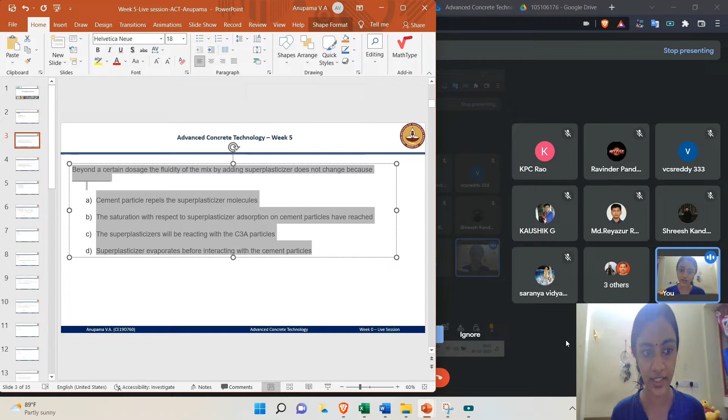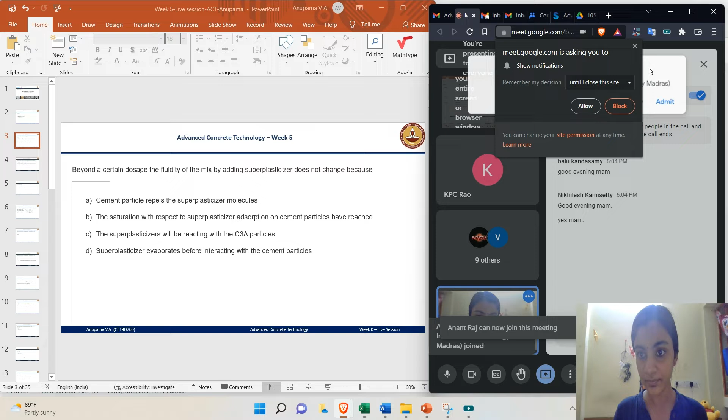Beyond a certain dosage, the fluidity of the mix by adding superplasticizer does not change because of dash. Sorry, one second. Yes. So the question is, if you keep on adding superplasticizer beyond one dosage, the fluidity does not change. So, what might be the reason for that? Let me post the question again in the chat box. Thanks, Shreesh, for the immediate response. Beyond a certain dosage, the fluidity of the mix by adding superplasticizer does not change.

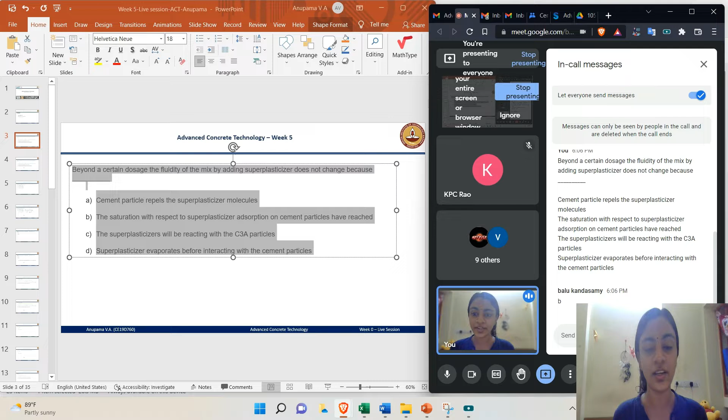So, superplasticizer we generally add in order to increase the workability, or keeping the workability same, increase the strength or reduce the cement content, etc. So, we think that when you add more and more superplasticizer, the mix will get more and more fluidity or workability. But the actual situation is that yes, it does increase, but after a particular optimum dosage, the fluidity does not further increase. So, what might be the reasons for the same?

That is, cement particle repels the superplasticizer molecules, or after that optimum dosage, the saturation with respect to superplasticizer adsorption on cement particles has reached, or the superplasticizers will be reacting with the C3A particles, or the superplasticizer evaporates before interacting with the cement particles.

Yes, I can see three answers. Okay, four answers. Shri, Sharanya, and Balu say B. Riya says B. Nikhilesh, okay. You can just simply type the option. That will be easy for you. I'm waiting for more answers. Yeah, Nikhilesh, no problem. How many are there? 14 attendees are there. So, shall I wait for some more time? I think this is a fairly easy question, so I would like if more of you can answer. Where are the other answers? Are you guys traveling? Are you not in a position to type?

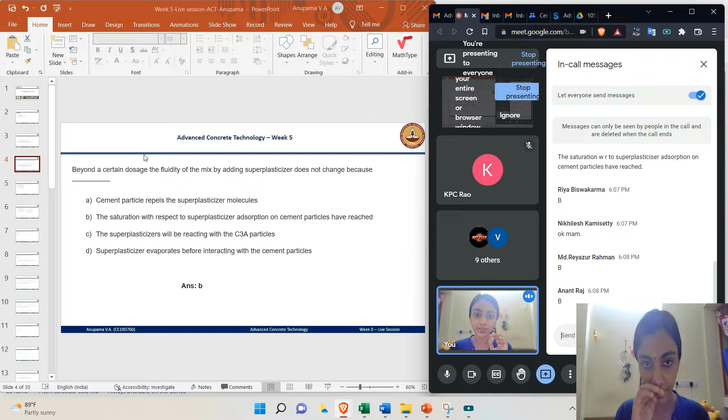Moving on to the next question. As per Aitcin, for a compatible combination of cement and superplasticizer, the flow curves from marsh cone test coincide at the time. The options are 0 minutes and 60 minutes, 10 minutes and 60 minutes, 0 minutes and 100 minutes, 0 minutes and 10 minutes. Thanks again, Shreesh, for the quick reply.

So, according to Aitcin, we have to do the marsh cone test to find the compatibility between the cement and the superplasticizer, because not all superplasticizers are compatible with a particular type of cement or binder. If you do the marsh cone test, you can see the flow curve at a particular time. He says that at particular times t1 and t2, the curves coincide. So what are t1 and t2? Is it 0 and 60 minutes, 10 and 60 minutes, 0 and 100 minutes, or 0 and 10 minutes?

Okay, I'm getting more and more answers now. Sri Sharad, Riya, Anant, Sharanya, KPC Rao, Ravinder Pandey, and Nikhilesh have commented A. Thank you all for commenting. I'll wait for a few more seconds. Yes, Rahman and Balu commented A. So no one wants to go to any other option.

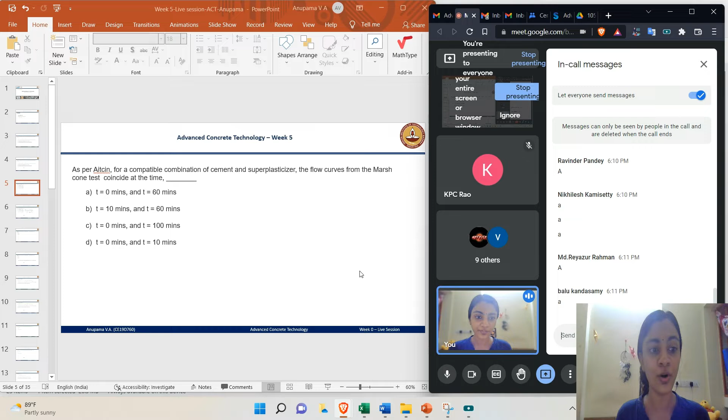So as of now, all of you have commented A. So moving on to the answer. I hope the answer screen is visible to you. So here it is. This is a flow curve. I just copy pasted from the slides we have. So when the SP is compatible, this is the initial and this is after 60 minutes.

So if at 0 minutes and at 60 minutes the curves are coinciding, then that particular cement and superplasticizer are considered to be compatible. So please remember the timing, 0 minutes and 60 minutes.

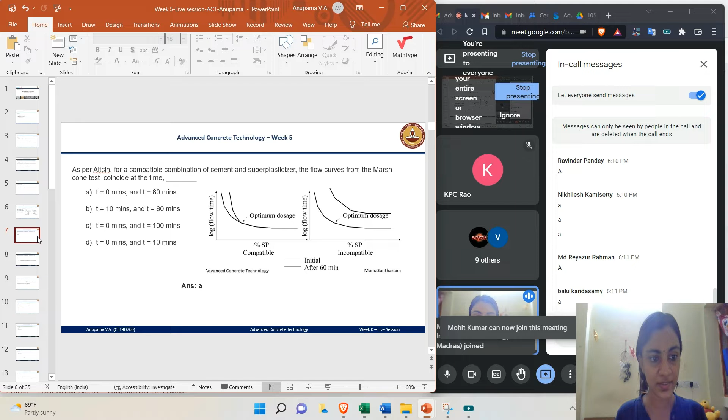I have received responses from Rao, Balu, Sharanya, Shri, Sharad, and Riya. So majority goes with false, and there are a little bit of true in between. Yeah, it might be a bit confusing because we have three generations of admixtures and different slump levels are mentioned. So here the catch is no slump concrete.

Yeah. Let me wait for a few more seconds. Let me see what are there. So I have not heard from Kaushik. Kaushik, if you are in a position to unmute, can you unmute? I have seen almost all the other names, I guess. Kaushik, are you in the meeting? Sharad Jadhav, are you in the meeting? If you can please unmute. Yes, I am in the meeting.

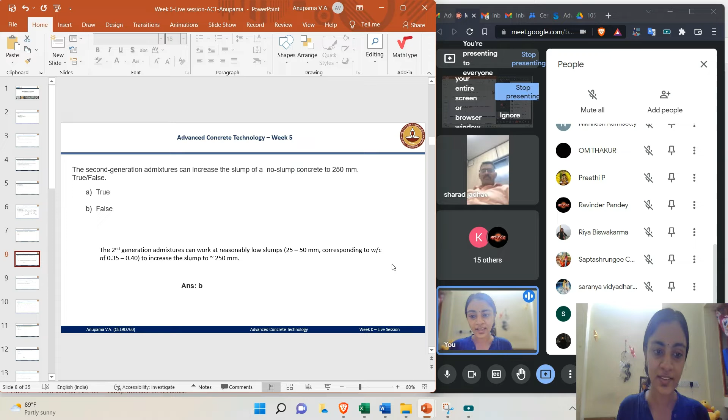So the correct answer, as rightly told, was B. The second generation admixtures can work at reasonably low slumps. It cannot work at a no slump concrete. It can work at a reasonably low slump, that is 25 to 50 mm, corresponding to a water cement ratio of 0.35 to 0.4, and it can increase it up to 250 mm. That is true, but not from a zero slump concrete. It can increase, but only from 25 to 50 mm. So the correct answer is false.

So thank you, Sharad sir. Sir, can you mute? Yeah, thank you so much.

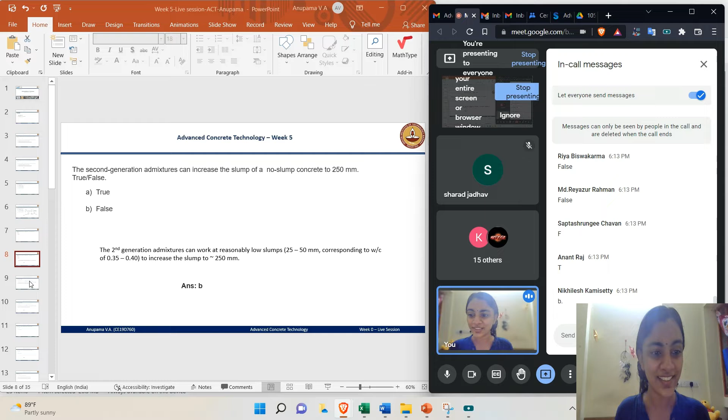Yes, so we move to the next question. Now, choose the correct statements. Read these statements carefully before you answer. It's about reactive powder concrete. Reactive powder concrete is also known as high early strength concrete. That's the first statement. Then, reactive powder concrete uses only fine aggregate and not the coarse aggregate.

Reactive powder concrete is intended to provide a compressive strength of more than 150 MPa. Then, SNF admixture is typically used in reactive powder concrete. So, these are the four statements.

So, yeah, I got the answers from Shrish, Reyazur Rahman, Anant Raj, and Saranya. Let me pause the screen share for a second. You have the question in the chat box. Yeah.

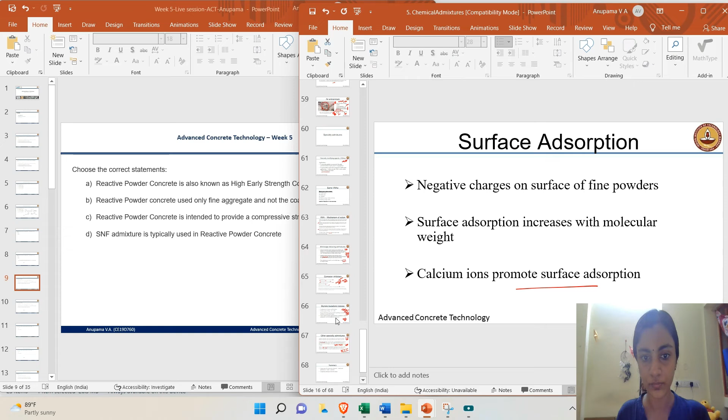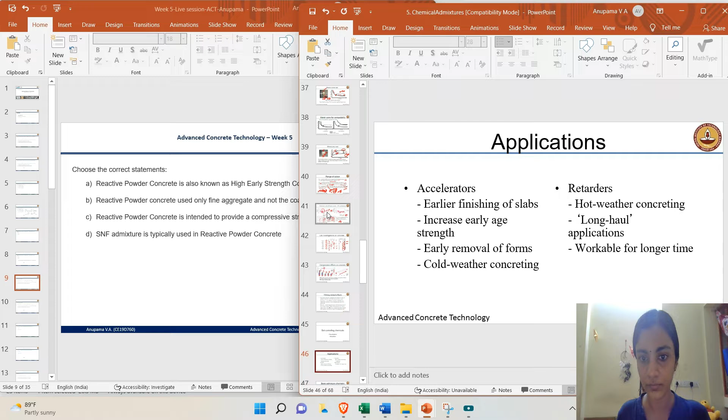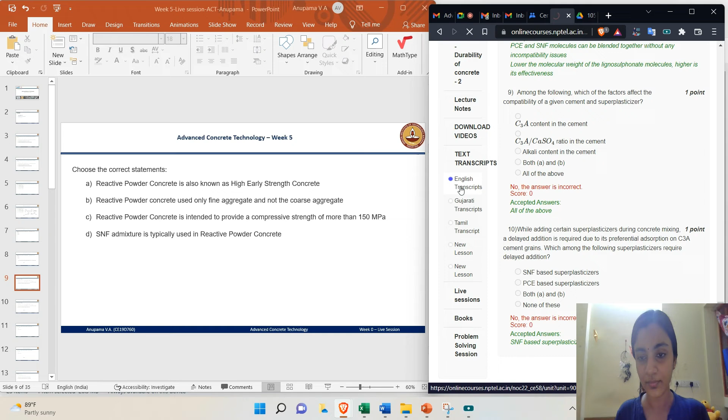Yes, I'm seeing so many answers. A, B, A, B. So, reactive powder concrete is also known as high early strength concrete and it uses only fine aggregate and not coarse aggregate. Okay. I'll wait for a few more seconds.

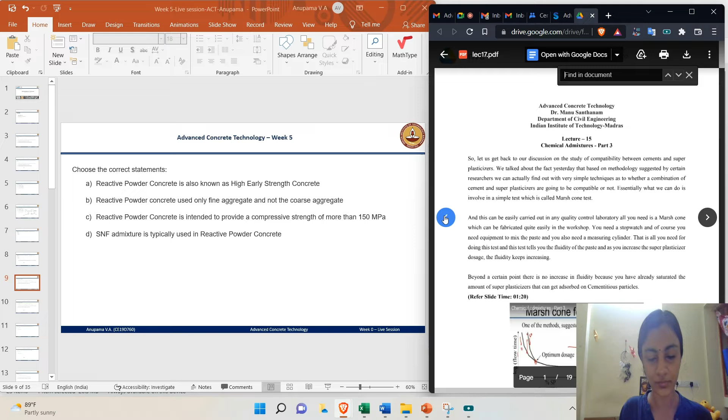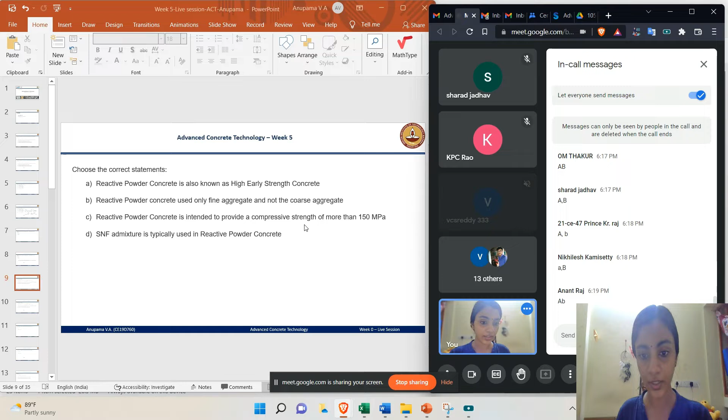Okay, so I'll share the screen. One second. Yeah, I hope the screen is visible to you.

So the options were, it's also known as high early strength concrete, it uses only fine aggregate and not the coarse aggregate, it is intended to provide a compressive strength of more than 150 MPa, and SNF admixture is typically used in reactive powder concrete. So I have received all the answers as AB or ABC except D. So thank you all for responding. So we move to the answers.

The correct answers are B and C. So who had commented B and C? Only Anant Raj, I guess, commented B and C. Yeah, I think yes, right? But then Anant Raj changed it to A and B. Okay. So the correct answer is B and C.

Why not A? Because it is also known as ultra high strength concrete. It's not high early strength concrete. It is ultra high strength concrete. So it's not A, and it uses only fine aggregate and not coarse aggregate. Hence the name reactive powder concrete.

And the reason for calling it ultra high strength concrete is because it has a compressive strength of more than 150 MPa generally. So B and C are the correct answers, and D, SNF admixture is not used in reactive powder concrete. Okay, so the correct answers are B and C.

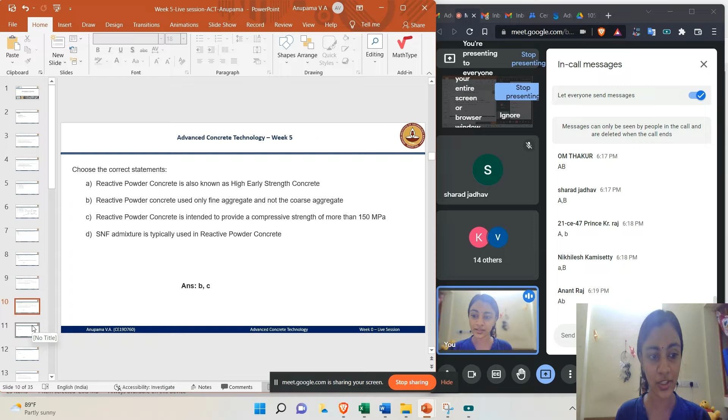No problem if your answers went wrong. So keep on answering in the chat box. Then only I'll know how much you're following, or whether you're here.

Okay. So the next question is, as the temperature increases, the superplasticizer dosage to produce a given slump increases, decreases, or does not change. As the temperature increases, the superplasticizer dosage to produce a given slump. So this is a fairly easy question. Yeah. As the temperature increases, the superplasticizer dosage to produce a given slump.

Okay. Thank you, Shreesh, Harsha, Rahman, Riya, Om Thakur, Anant Raj, and Balu, Nikhilesh. Thank you all for responding in the chat box. Others, yeah,

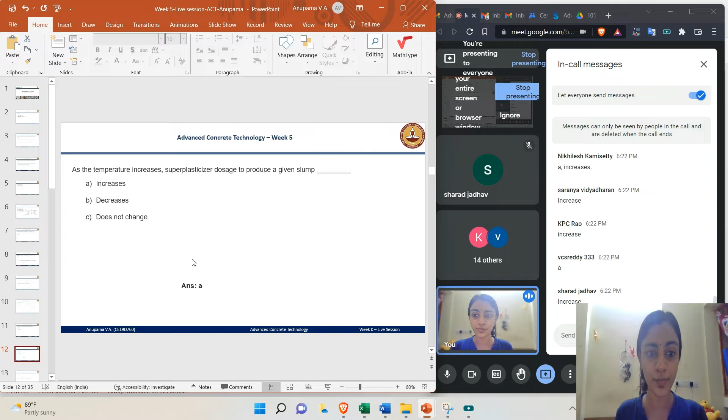okay. Since I'm getting more responses in increases, let me go to the answer. Yeah, the correct answer is increases. So as the temperature keeps on increasing, hydration takes place faster. So we need to give more superplasticizer dosage to produce a given slump initially. Moving on to the next question.

So, what are defoamers? The question is, what are defoamers? Options are as follows. A, they are foaming agents in air entrained concrete. Option B, they are admixtures to prevent air entrainment. Option C, they are chemicals that prevent bacterial growth in organic polymers. D, are they chemicals which facilitate effective dispersion of superplasticizers? So, what are defoamers?

So here the question is, what are defoamers? Are they foaming agents in air entrained concrete, or are they admixtures to prevent air entrainment? Are they chemicals that prevent bacterial growth in organic polymers, or are they chemicals which facilitate effective dispersion of superplasticizers?

Okay, so I've received the answers as they are foaming agents and they prevent bacterial growth. Okay, so I'm waiting for more answers. So I have received A and C. Okay. A, C. Okay. I'll wait for a few more seconds. Okay. Moving on to the answer.

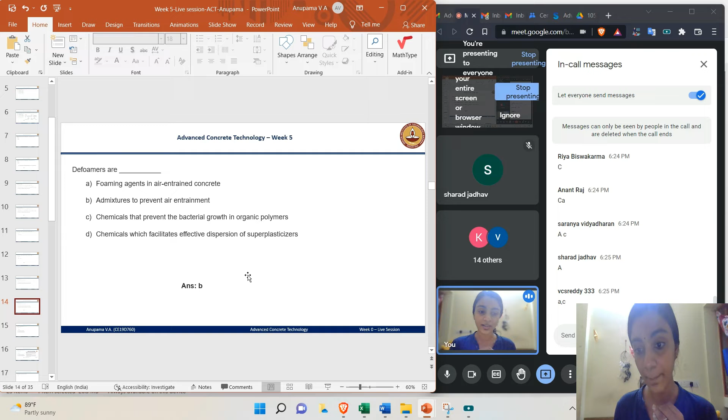Okay, so keep that in mind. The name shouldn't confuse you. In fact, the name should lead you to the answer. Foamers, I agree, are foaming agents in air entrained concrete, but defoaming means removing something, or being against something, so against foaming. So defoamers are the admixtures to prevent air entrainment. So the correct answer is B. Okay, moving on to the next question.

Accelerators increase the dissolution of dash. Calcium ions, aluminates, silicates, both calcium ions and silicates, or both calcium ions and aluminates. Accelerators. So you all know what accelerators are. They're majorly used in cold weather concreting, when we need to speed up the process of hydration, or when you need to remove the formwork very fast. In those cases, we use accelerators.

So there are different types of accelerators. Generally, the principle is that they increase the dissolution of certain ions. So the question is whether they increase the dissolution of calcium ions, or aluminates, or silicates, or both calcium ions and silicates, or both calcium ions and aluminates.

Okay. I can see that I have received so many responses. Thank you. Harsha, Bharat, Nikhilesh, Saranya, Riya, Anant Raj, Balu, Sharad, Shreesh. I have got a wide variety of responses, I guess. I have A. Okay, VS Reddy. Yeah. A, C, A, C, B, C, D. Good. Okay. I'll give 2, 3 more seconds.

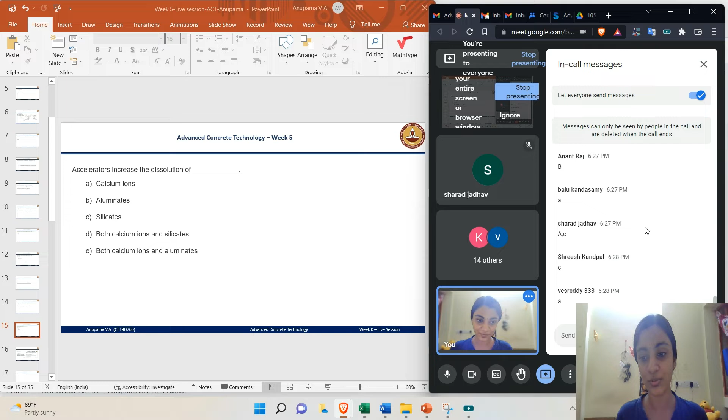A little bit more seconds, so that others who want to answer, please do answer. At least there are 17 people who can answer this question in this meeting. So please feel free to express your opinion. No one is judging you. So whichever you feel is right, please feel free to express it in the chat box.

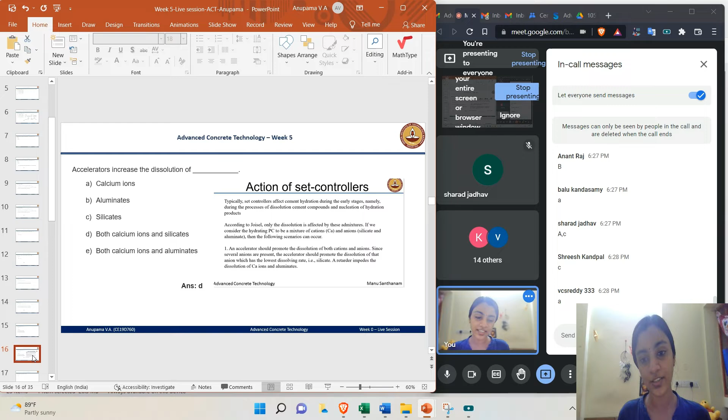Okay. So we move to the answer now. The correct answer is D. So I have included the screenshot of the PDF and PPT also here. So here, an accelerator should promote the dissolution of both cations and anions. Since several anions are present, the accelerator should promote the dissolution of the one with the least dissolving rate. So that is silicate. So comparing silicate and aluminate, silicate dissolves very slowly.

So like if you are in a manufacturing process, in order to increase the manufacturing rate, we need to improve the weakest link. So, like that, in the case of silicate and aluminate, aluminate dissociates faster. So, what lags behind is silicate. So, we need to improve the dissolution of silicate for an accelerated performance. So, an accelerator definitely will increase the dissolution rate of silicate.

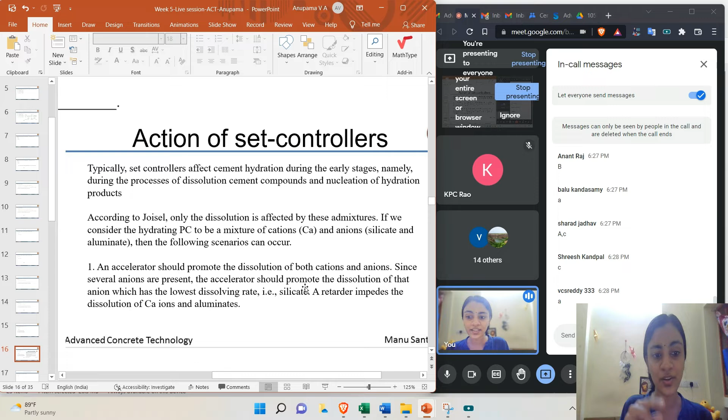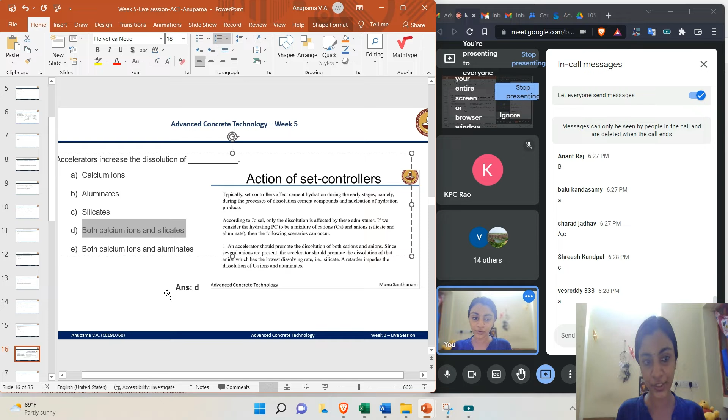And it says that both the cations and anions, it should promote the dissolution. So, for calcium and silicates, it will improve the dissolution. So, the correct answer is D. Okay, you're right if you say A and also C, but here D option says it's both A and C. So you have to go for option D. Moving on to the next question.

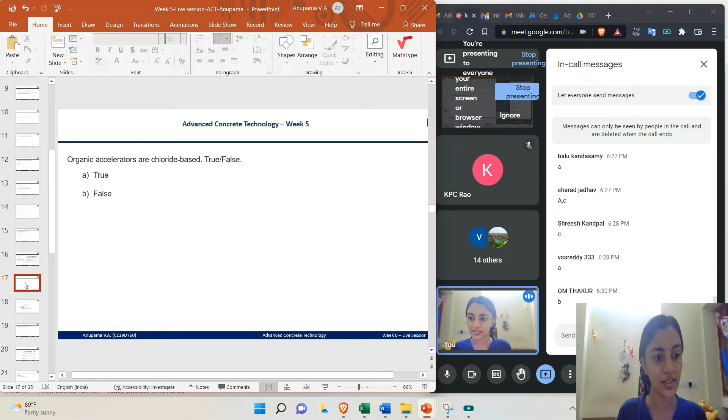No, B is not the answer because B is aluminates, right? Yeah, B is aluminates. Aluminates already have a higher dissolution rate. So generally the accelerator will focus on the ion which has the slowest dissolution rate. So that is silicate. Okay. So if you are running a relay, you have to focus on the person who has the least speed, because of him you guys might lose.

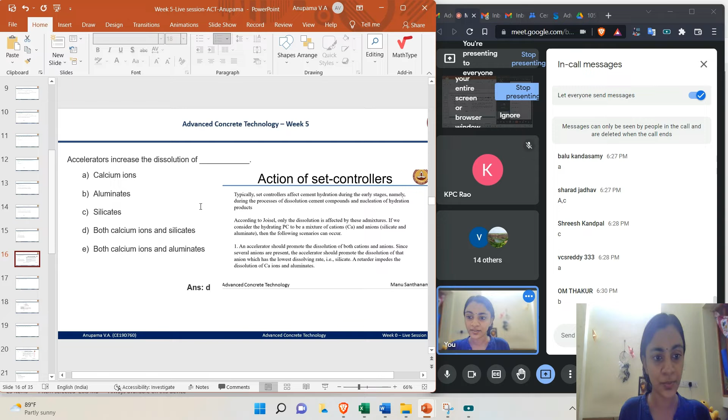So similar to that, there are so many cations and anions in the cement mix. So in that, the slowest dissolving is silicate. So you have to focus on silicate. So the correct answer is D. Moving on to the next question. Organic accelerators are chloride based. True or false? Organic accelerators are chloride based. True or false?

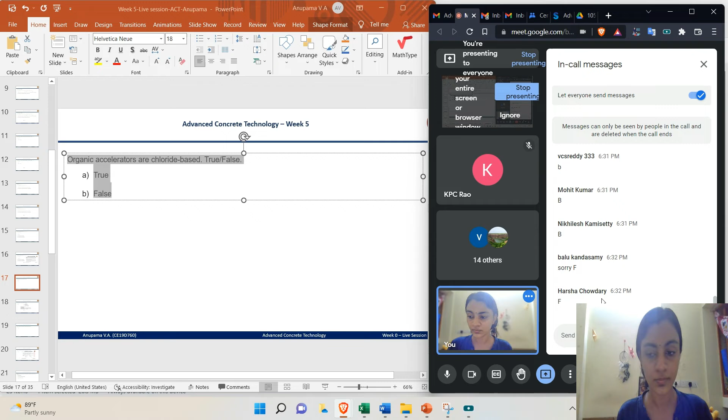Okay. Thank you, Shreesh and Balu. Others? Okay. Okay. Okay. So thank you all for responding. Shreesh, Balu, Bharat, Sharanya, Ria, V.C.S. Reddy, Mohit, Nikhilesh, Balu, Harsha, and KPC Rao.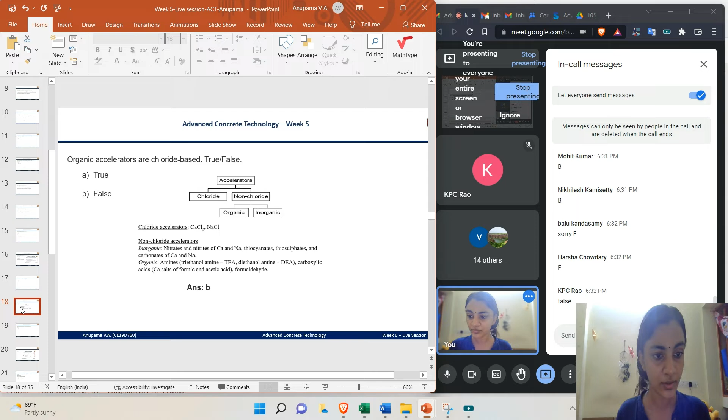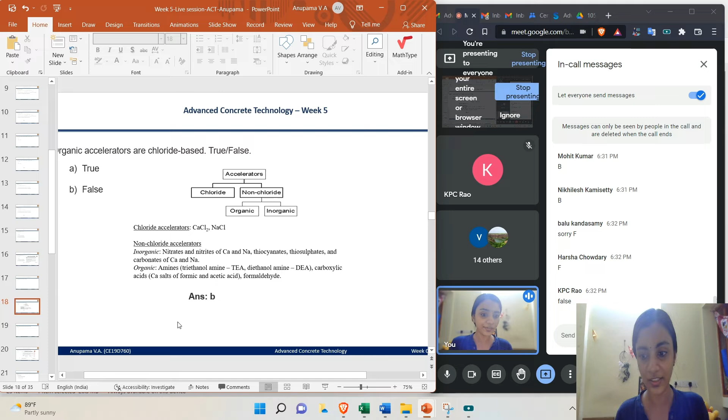Yes. So going on to the correct answer. So the answer is B, false. So here, if you see that screenshot from the presentation, the organic ones are TEA/DEA, triethanolamine or diethanolamine, basically the amines, and the carboxylic acids and formaldehyde. So the chloride accelerators, they are separate. Non-chloride are organic or inorganic. So chloride ones are calcium chloride and sodium chloride. So they are not organic accelerators. Okay. So the correct answer is false, as all of you have rightly told. Moving on to the next question.

The air entrainers have a hydrophilic main chain with hydrophobic branches. Whether it is true or false. Okay. Shrish, Harsha, Sharanya, thank you all for responding. Bharat, okay. Balu, Nikhilesh. Okay, let me go with Shrish. Shrish, can you unmute and tell why you think it is false, or is there any justification?

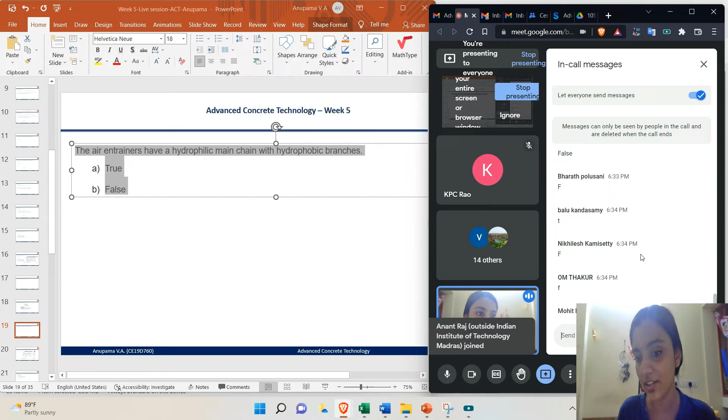Ma'am, it is saying that it has a hydrophilic main chain, which is wrong because for the air entraining agent, it is a polar group. Yeah. So there is a polar group, and attached to that is a hydrophobic main chain. Is that right? Hydrophobic chain. A hydrophobic short chain which is attached with a polar group, which is anionic in nature. Okay. Thank you, Shrish. So here telling that there's a main chain which is hydrophobic with a polar group attached to it.

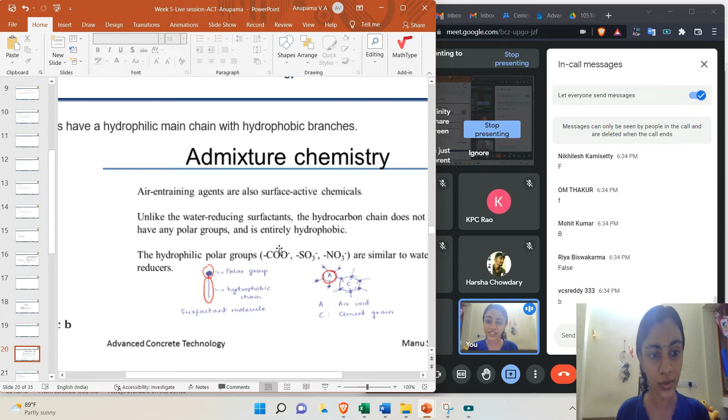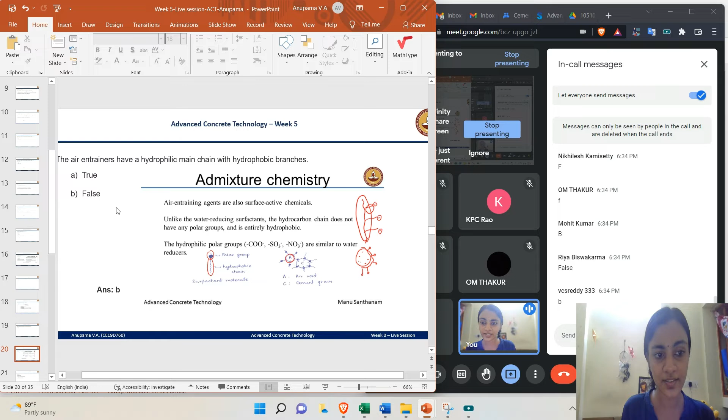Yeah. So let's move to the answer. So I guess many have responded. Mixed answers are coming. So the correct answer is false. So here, as Shrish rightly told, the hydrocarbon chain does not have any polar part. It is entirely hydrophobic. There is no hydrophilic main chain. So the entire chain is hydrophobic. So the correct answer is false. Moving on to the next one. It's again related to the air entraining agents.

So the question is, the air entraining admixtures stabilize the air bubbles generated by the agitation and mixing of concrete by altering the steric hindrance, or by altering the charge on the surface of the cement, or altering the cement surface tension, or altering the surface tension of water. So how do air entraining agents stabilize the bubbles?

So generally, when we mix or agitate the concrete, the air bubbles are formed, but the air bubbles will burst and just vanish within a matter of few seconds. It will not be stable. The air entrainers are added to stabilize the air bubbles. So how do they stabilize? Is it by steric hindrance, or by altering the charge on the cement surface, or by changing the cement surface tension, or by changing the water surface tension?

So yeah, thank you, Balu, Shrish, Bharat, Sharanya, Mohit, and Ria. I'm waiting for more answers from your end. Om, thank you.

So most of you have commented. Okay, I can see mixed responses. So there is altering the steric hindrance as one answer, altering the surface charge of cement as one answer, and altering the surface tension of water as another answer. So majority of you have commented surface tension of water. Yeah. So the correct answer is altering the surface tension.

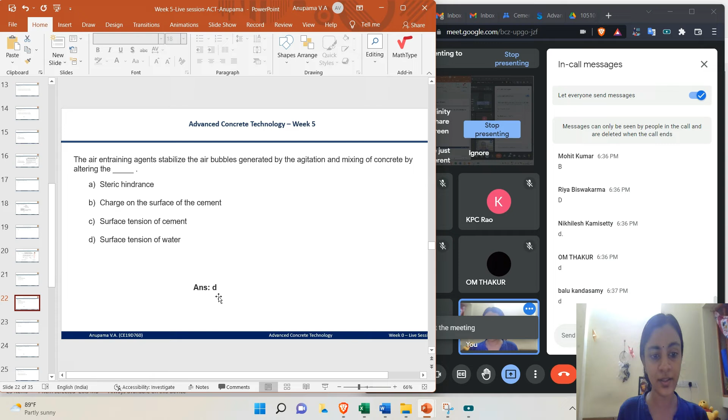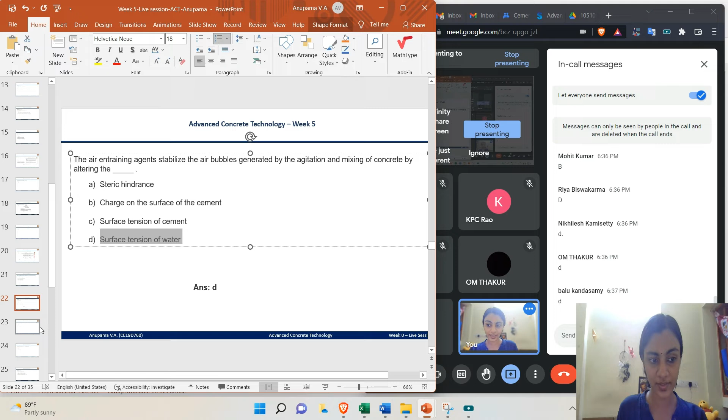So air entrainers change the surface tension of the water and it stabilizes the air bubbles within the cement. Yes. So those who all commented anything other than D, please stay corrected. Air entrainers work by altering the surface tension of water and stabilizing the air bubbles within the mix. Moving on to the next one.

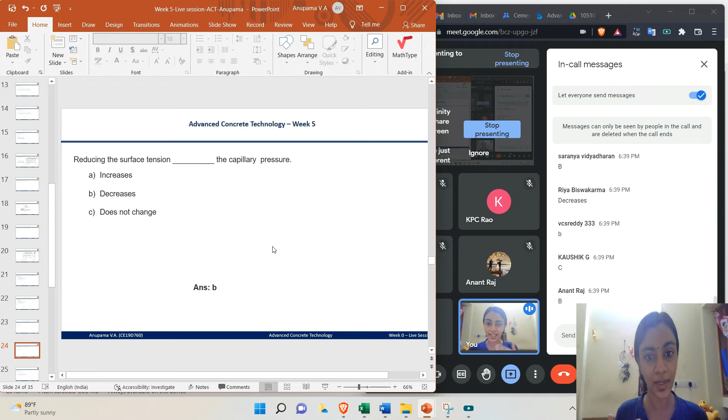The correct answer is decreases. So reduce surface tension, capillary pressure reduces. So they are directly related, not indirectly related. If you reduce the surface tension, the capillary pressure also decreases. So that is why the air entrainers are acting by reducing the surface tension of the water.

Now the next question is, what is latex? This was explained in Professor Manu's lecture. Is it the suspension of styrene in water? Option A. Option B, is it a suspension of butadiene in water? Option C, is it a solid solution of styrene and butadiene? Then option D, is it a suspension of styrene and butadiene in water? So what is latex? You might have heard this word quite a number of times.

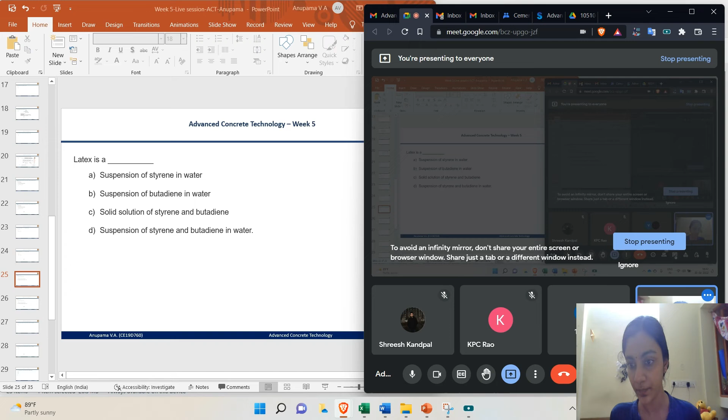Thank you, Bharat, for the quick reply. Shreesh, Anant, thanks for consistently replying in the chat box. Okay. Oh, I am getting so many C's. Solid solution of styrene and butadiene. Then Rao sir commented it is D. Shreesh also goes with D. Anyone else? What about Sharanya? Riya also goes with C. Sharanya also goes with C. Who else was there? Preeti, I have not heard Preeti yet. Are you there? You need not even unmute, you can just answer in the chat box. Dharmesh, I have not heard from you either. That's it with Riya. Okay. Moving to the answer.

Unlike the popular opinion, the answer is D. It is a suspension of styrene and butadiene in water. It's not a solid solution, it is a liquid solution. So styrene and butadiene are suspended in water, that makes latex. It is a solution in water which is a mix of styrene and butadiene. So stay corrected, please. The correct answer is D. Latex is a suspension of styrene and butadiene in water. Okay, moving to the next question.

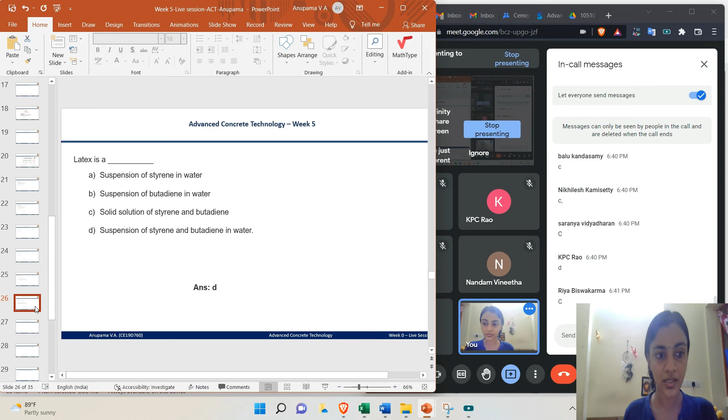A watertight system is protected from the action of water under pressure. State true or false. There is a system, it is a watertight system. Can it protect that system from action of water under pressure? So water is coming from somewhere with pressure. Will that system be able to withstand? The statement says that it can withstand. Is this a true statement or a false statement?

Yes. Thank you, KPC Rao. Nikhilesh, Balu, Ria. Thank you all for responding. Sharanya also. Who else was there? Shreesh, what happened to Shreesh? He was my fast responding person. Shreesh says false. Okay. Read that question again. True or false? What about Anant Raj? I'm just recollecting the names I have seen in the chat box. Preeti, again, not there. So the chat ends with Shreesh. Let's move to the answer.

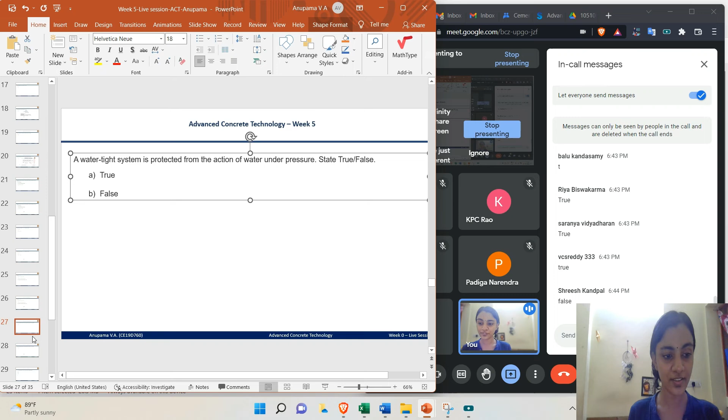So even though Shreesh was a bit behind in the timing, he was right. The correct answer is false. There are two types of systems, watertight or waterproof. Waterproof systems are protected from the action of water under pressure, not watertight systems. Watertight systems can protect if water falls on them or if exposed to water, but not under pressure. Water under pressure is the catchy phrase here. So the correct answer is false. Moving on to the next question.

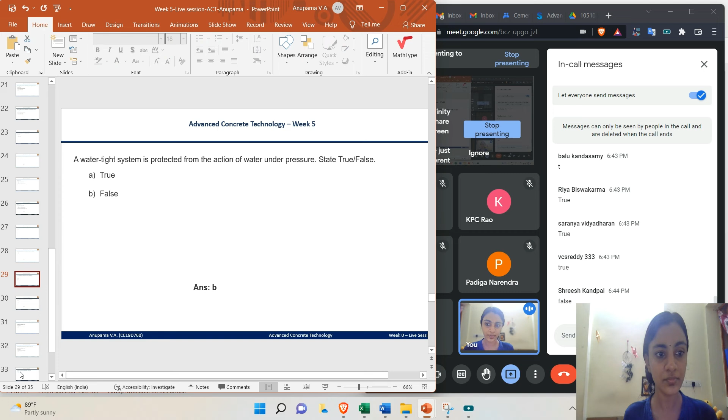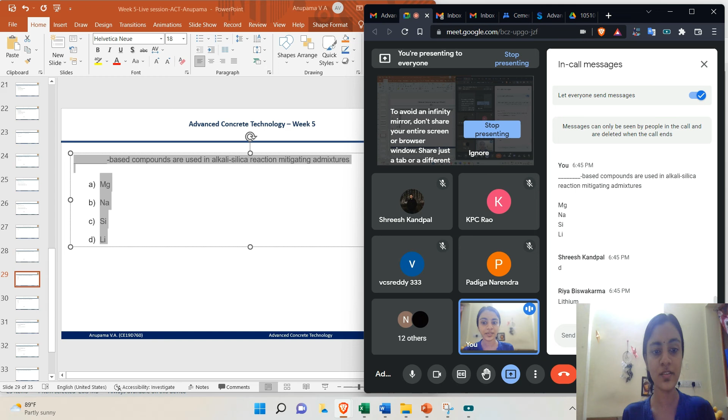In the durability part, we will come across different issues faced by concrete systems, one such as the alkali silica reaction. It is basically because of the alkalis in the system reacting with the silica from the siliceous aggregates. So alkali silica reaction happens.

That is very problematic to the concrete system. So there are alkali silica reaction, or ASR, mitigating admixtures. The compounds are either magnesium based, sodium based, silica or silicon based, or lithium based. These are the four options for you: magnesium, sodium, silicon, or lithium.

Okay, I got responses from Shreesh, Riya, Balu, Malleswari, Saranya, VCS Reddy, and Nikhilesh. What happened to Rao sir?

Okay, moving on to the answer. The correct answer is lithium, as you all have rightly told. Lithium-based compounds, before the alkali could react with the silica, bind the silica so that it is not available for the alkalis. So the silica will not be available for any ASR reaction. Since it has that ability, lithium-based compounds are used in ASR mitigating admixtures.

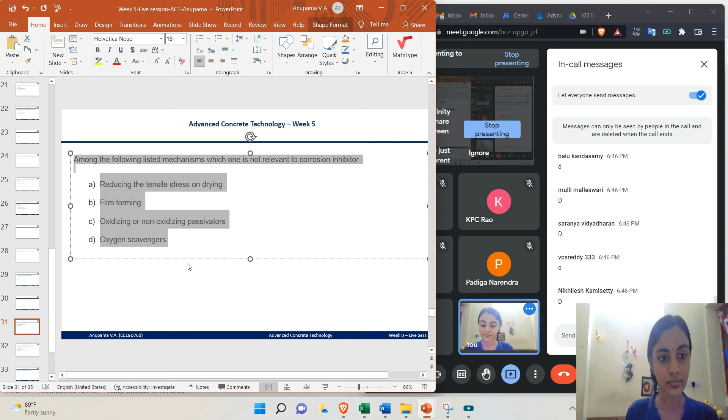Among the following listed mechanisms, which one is not relevant to corrosion inhibitor? Corrosion is a severely affecting problem regarding reinforced concrete structures. It degrades structural health, and if you see the economic impact of corrosion of a nation, it is very huge because maintenance and rehabilitation of structures, especially in India, is focused on how to mitigate corrosion or repair corroded structures, including bridges. So it is a very economically impactful issue in the construction industry.

There are corrosion inhibitors which can be added during the time of concrete mixing itself. So what are the different mechanisms in which corrosion inhibitors act? The question is which one is not relevant to corrosion inhibitor, which is the odd one out. Option A: reducing the tensile stress on drying; film forming; oxidizing or non-oxidizing passivators; and oxygen scavengers.

Okay, I have received many responses for this question. Thank you, guys. Moving on to the correct answer, which is A, as you all have rightly told.

It does not act on the drying tensile stress. It can either form a passivating film, or oxidize the passivators, or make the oxygen not available for the corrosion. We'll deal in detail about corrosion in the coming lectures when it comes to durability, but as of now, corrosion needs oxygen, moisture, and some anode and cathode.

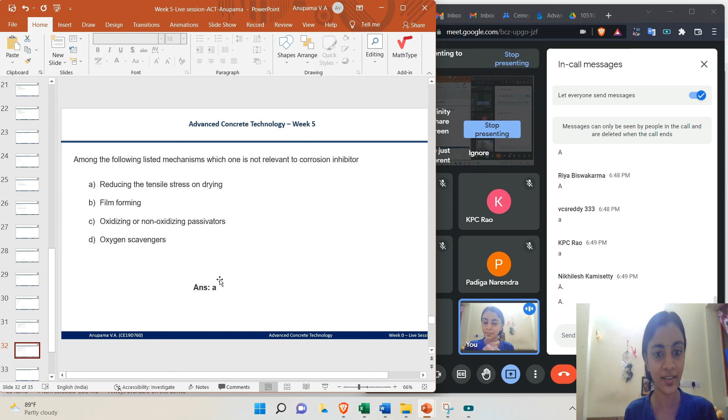Electrolyte, all things should be there, but especially oxygen and moisture are mandatory for corrosion to happen. So regarding oxygen scavengers, if you are making the oxygen not available for the reaction, it will not happen at all. That is one method in which corrosion inhibitor works. So the correct answer is reducing the tensile stress on drying, because corrosion inhibitor doesn't have any involvement in reducing the tensile stress on drying.

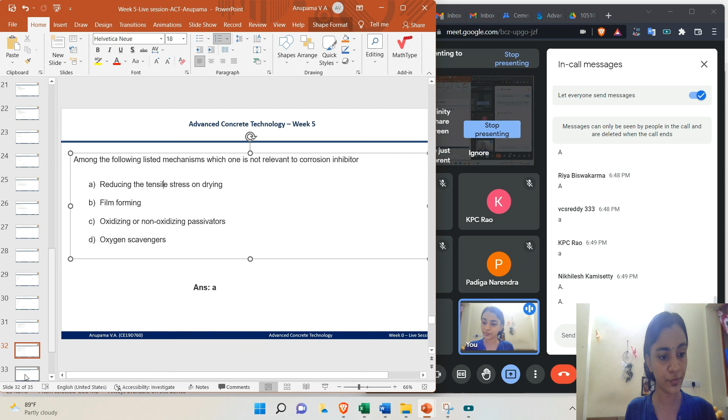Thank you, KPC Rao and Bharat. Waiting for more answers from your side. Shrish, Balu, Reddy, Sharanya, Riya. Okay, Nikhilesh. Okay, I guess that's all. It was a fairly easy question. So what about Anantraj? He left or what? Because he was a consistently replying person.